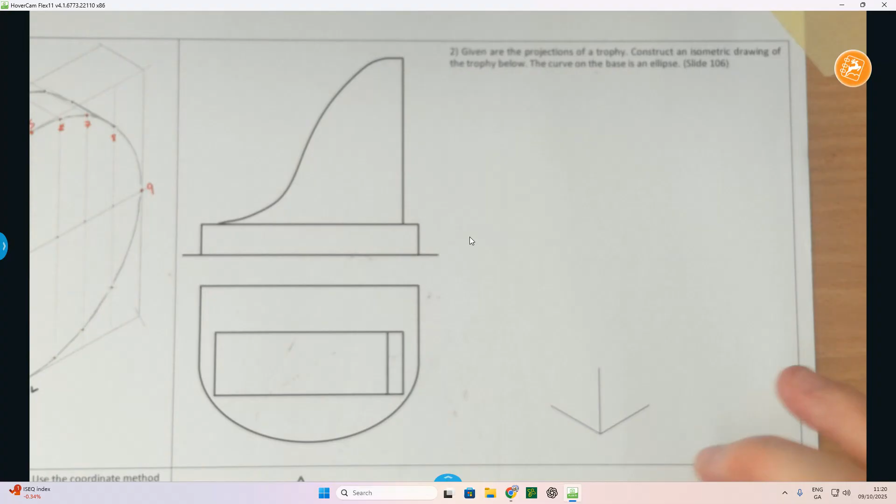The object here is going to be broken into two structures. We've got the base piece and then we have the bit on top. I'm going to start with the base piece and then do the bit on top. A little bit different from how it's done in the DCG solutions, but it doesn't really matter what way we go about it as long as we get it done correctly.

Anytime you're doing an isometric drawing, what you need to work out first is overall lengths, widths and heights. Usually in Junior Cert they would have been given to you, but for today I'm going to track that line across, top line, and put this in here. So that's my overall height, but then I have another height here on the outside for that little piece, so there's two heights: overall height and then the height of that little bit.

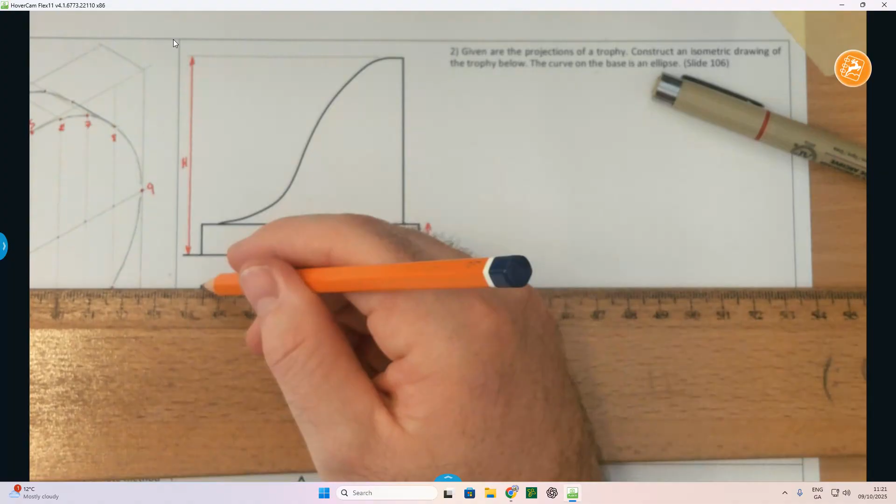Now what I want to work out is my overall width. The width will always come from the plan, so there and there. That's my overall width.

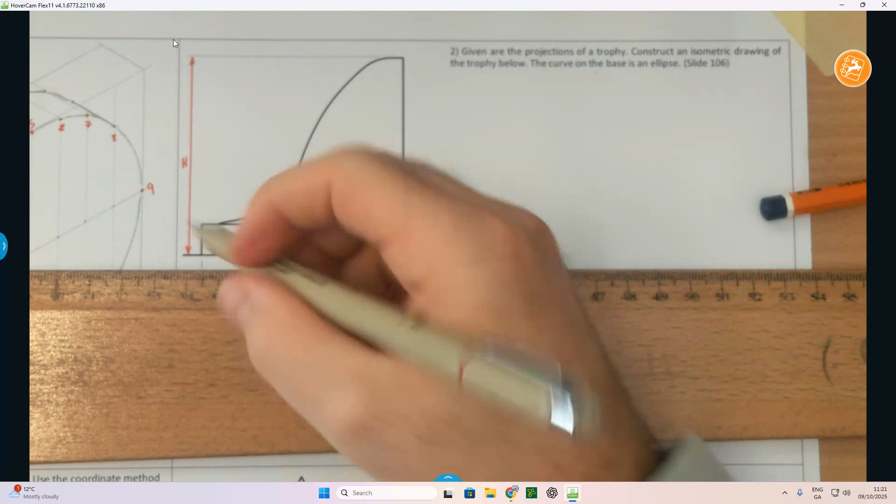And then what's my overall length? Well, my overall length is going to be brought from between there and there. Pop that in just to have a little reference. You don't have to put those in, I'm just identifying those. So length, width and height, just so we're all aware of that.

Now what I want to do is create the box that everything for the plan, or the first part here, is going to fit in, the bottom surface. That's going to be associated with this height, the correct length and the correct width.

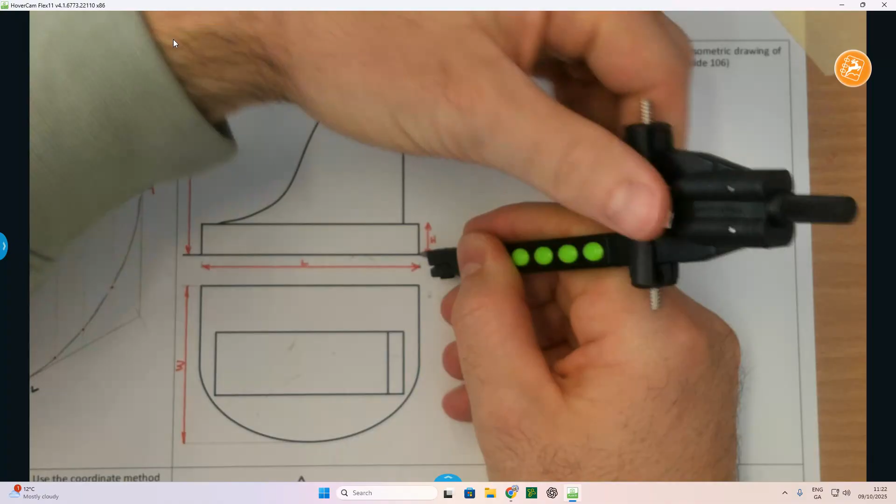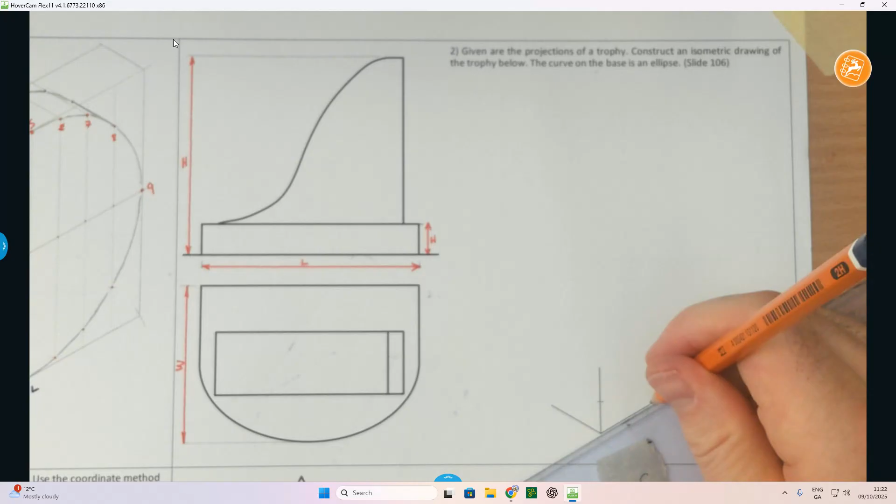I'm going to take the height from here. You can take the height from the elevation drawing here. Mark the height up along the height line. I'm going to take the length from there to there, and I'll be marking the length going at 30 degrees with my 30 degree set square. So you can just see there, 30 degrees out that way, flip it over 30 degrees the opposite way, and that's going to be my width. So I've taken the length from here out to here.

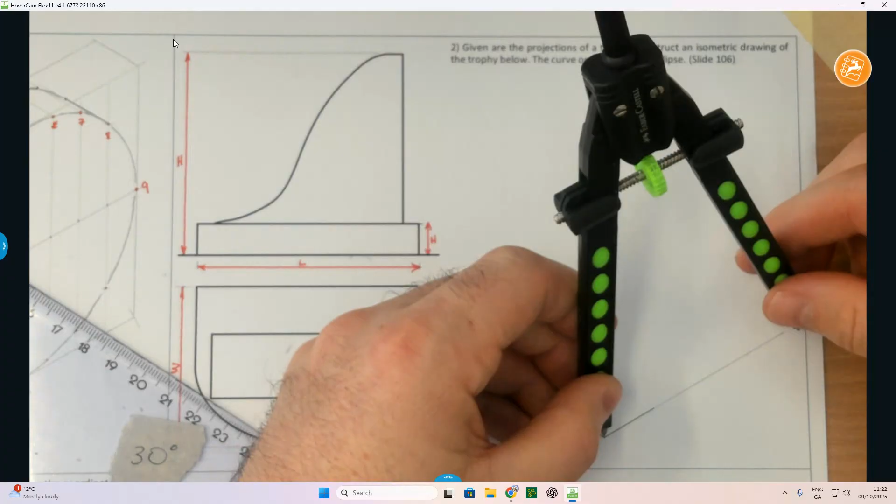I'm going to apply that to this edge right here. Need to extend it a bit further, but that's fine. Now I'm going to take my width. Mark the width out here. Once again, I just need to extend it a touch further. So there's the width, same thing with the length.

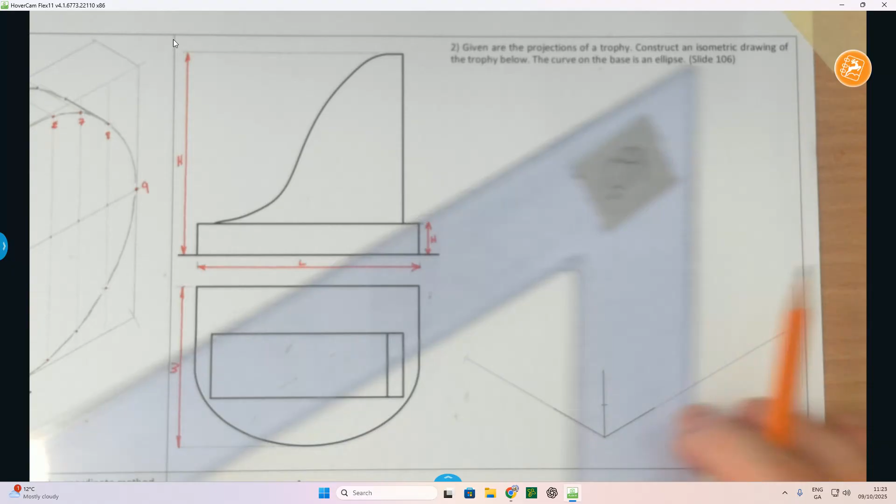Now that I've that done, little line up, and then using your 30 degree set square from the vertical height, go across, flip it over, and as I said, I'm just going to build that first object. There we go, so there's our little prism, there's our little fish tank.

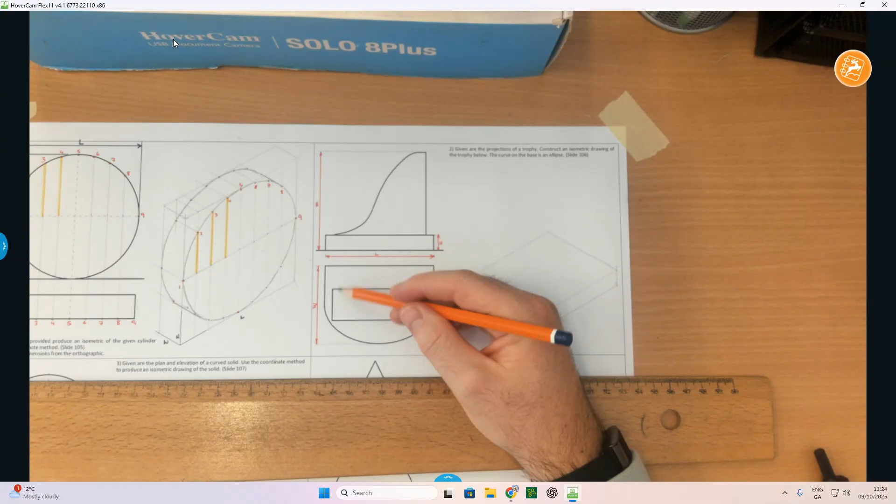Now what I want to do is make this guy here. Like we did with the question the other day in class, we're going to split it up into little sections. What we did here was known as vertical cuts, so just to zoom out, because we're working in the plan here, we're technically going to be using, they are vertical cuts, but they're kind of going horizontally in the plan. That's what I'm going to be using. It doesn't really matter which way you do it.

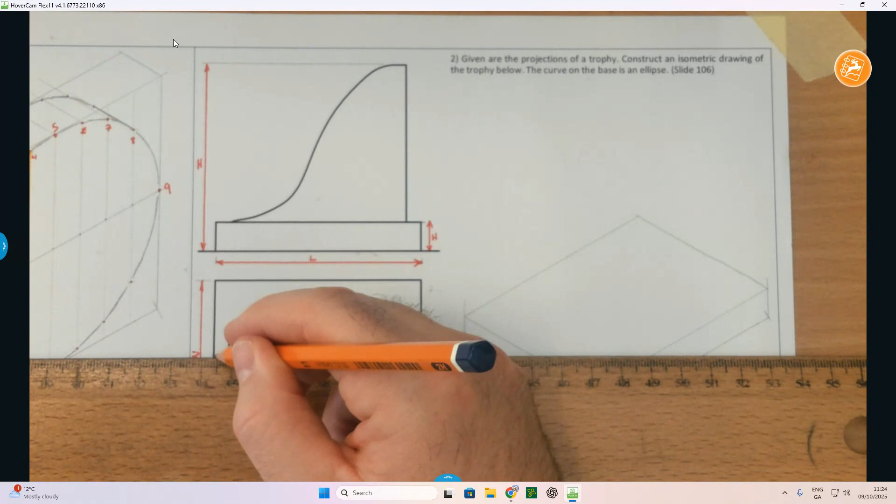So just to highlight where the curve actually starts, it starts about here, so I need to identify where the curve starts. It starts, I'm going to say about there, that seems to be where it starts. They don't really give us a measurement, girls, so we'll just base it off our sight. I'm going to do a line across like that, and that's where the curve starts, making that semi-elliptical portion.

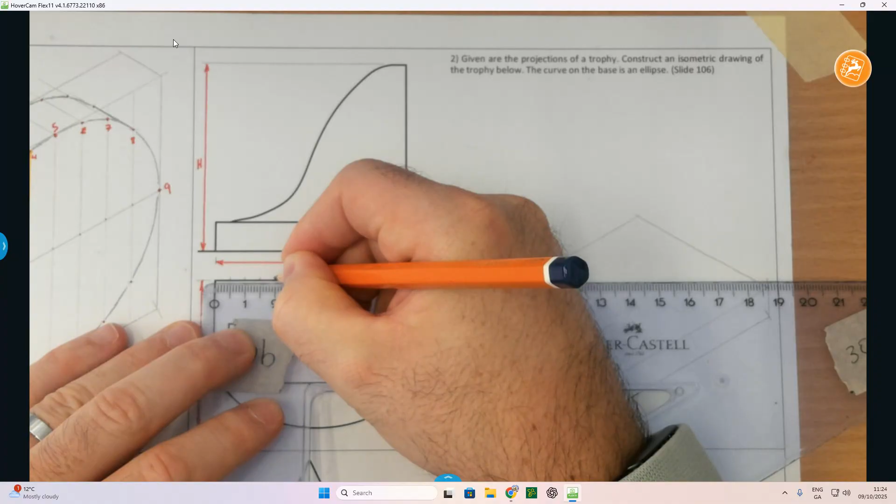What I want to do now is split it up, and I'm going to go across in increments, starting here at the left hand side, it doesn't really matter, but I'm going to go in increments of 5 millimeters. Watch: 5, 10, 15, 20, 25, 30. I'm going to do the same from the opposite side, so from here, I did 30, so I'll do 30 in as well. See the way I'm just going in increments of 5? Now by going in increments of 5, I'm giving myself more work to get points, but just popping those in.

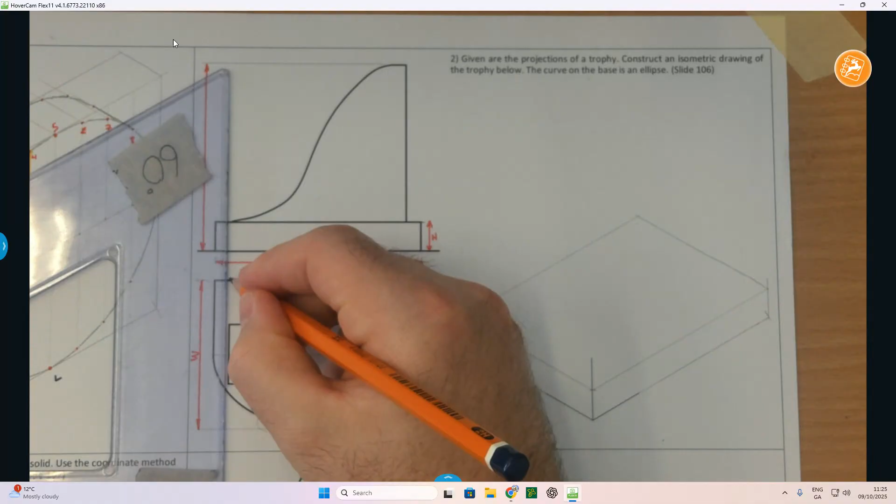Now those vertical cuts, I'm going to start slicing through it. Actually that's really handy that this first cut of 5mm seems to actually go straight through that line, so that's helpful.

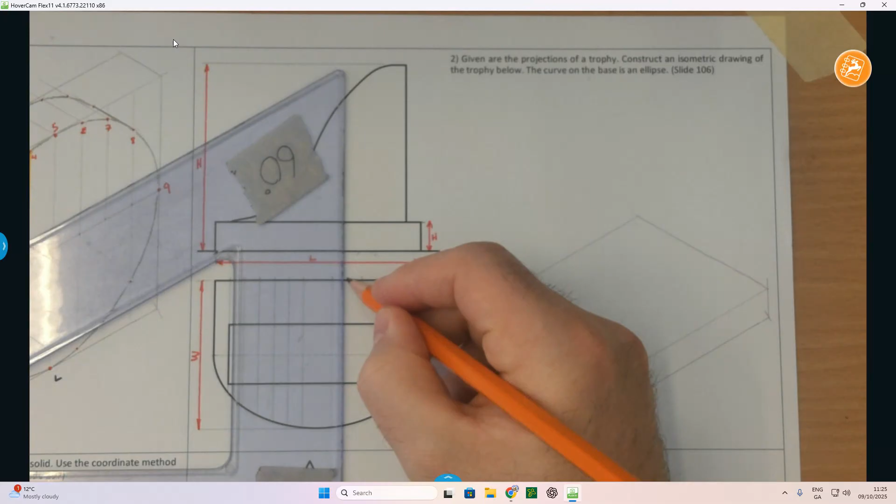Later on, all I'm doing is taking all of those guys. Looks like they're nearly there. Probably didn't need these ones, but that's just kind of what I went with, girls. Okay, it's like we're just splitting it up.

Really handy there, that bit now. Okay, and there we go. There's our little cuts. Now technically all those cuts are going to identify points on the curve for me. So see all those points?

Okay, there, and so on. Now technically they're all my points as I work my way around. I do want the one in the middle, so how would I actually get the middle? When I don't know the length of the line, I am going to bisect it.

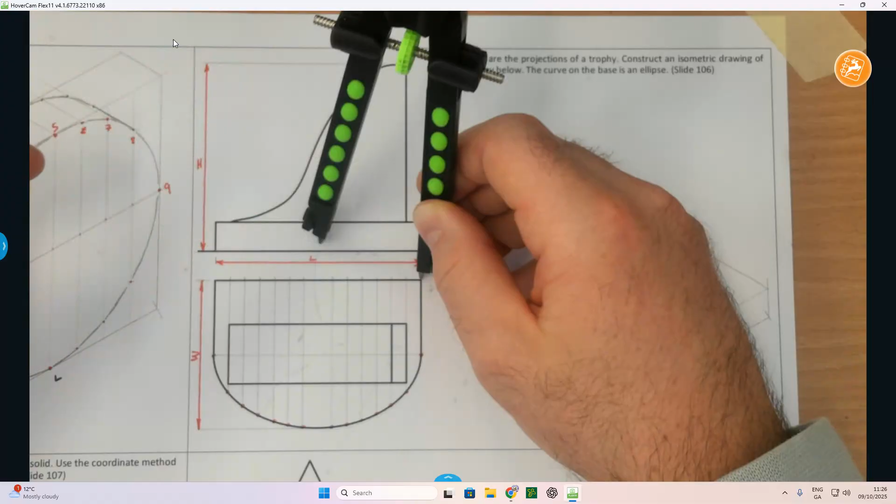So bisect the line here. You can always bisect the line to figure it out. So you can see how I've done my bisector there. And now that I've got the middle, I'll just pop that in down here. And that's the middle. Okay, not that I'm too pushed about that, but just to give me the exact distance I want.

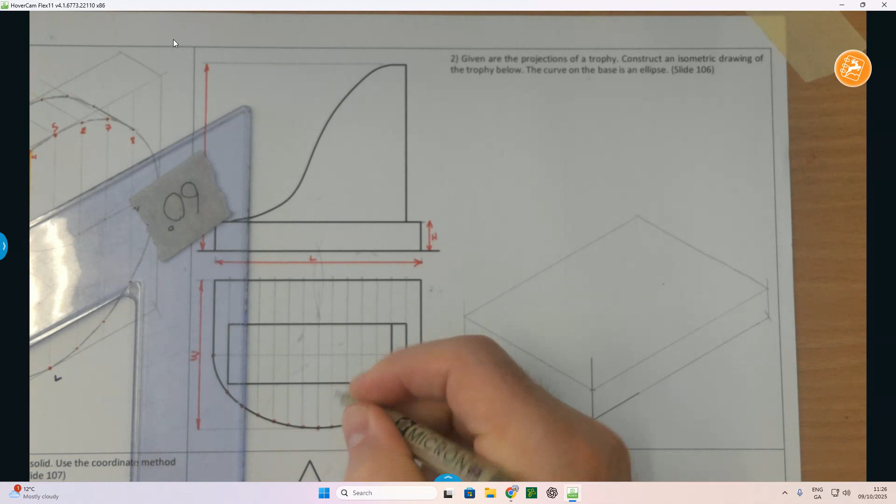Okay, now just to explain, I'm going to say that this is 1, then I've got 2, 3, 4, 5, 6, 7, say 8, 9, 10, 11, 12, 13, 14.

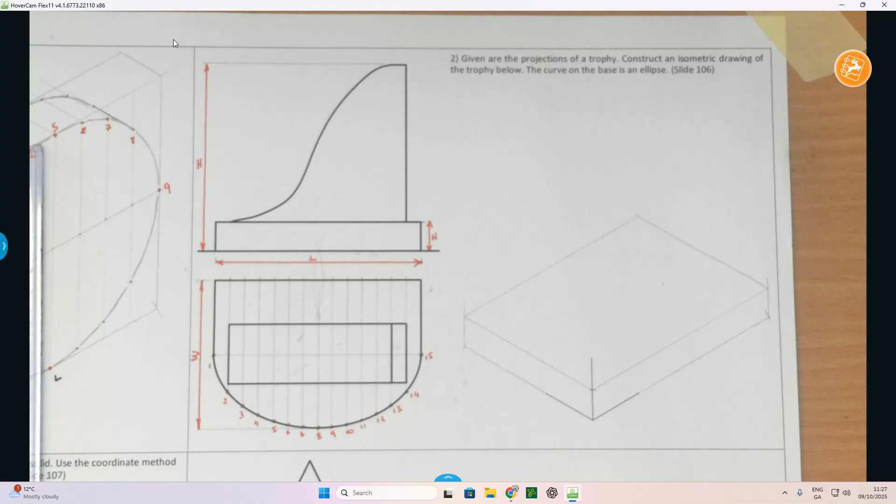I probably gave myself way too much work here on how I've done it, but it's absolutely fine. Okay, so what I want to know is that 1 is in line with 15, 2 is in line with 14, 3 is in line with 13, 4 with 12, 5 with 11, 6 with 10, 7 with 9, if that makes sense, because we measured in 5mm both sides.

So what I want to do now is divide this bit up here into increments of 5 as well. Starting here, doesn't really matter, at the back, because that's going to be the back edge. I'm going to measure, starting with the 30, so measuring increments of 5, 10, 15, 20, 25, 30, so that's done there. Same thing going backwards here, 5, 10, 15, 20, 25, 30.

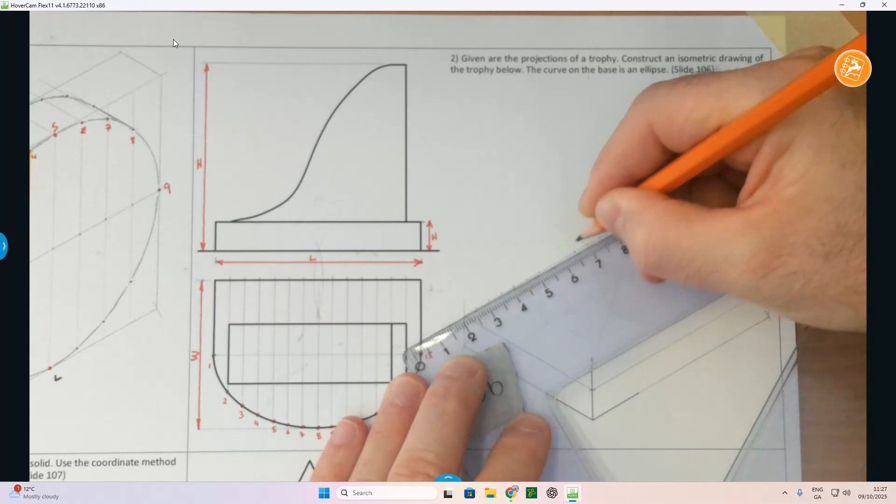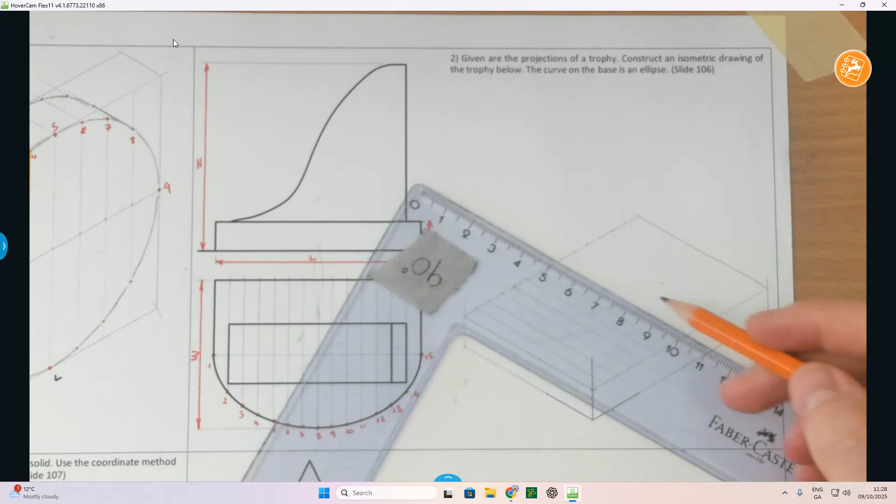So there's my guys. Now what I'm going to do is pop those in like this, just like little 30-degree lines like that. There we go. Now there is one in the middle. We'll worry about that later on.

Okay, so there we go. I'm after putting in my kind of lines at 30 degrees. Now, the question is which is where, okay? So 1 is along this, 2, 3, 4, 5, 6, 7, then there's 8 in the middle there, but 9, 10, 11, 12, 13, 14, 15. How do I find them?

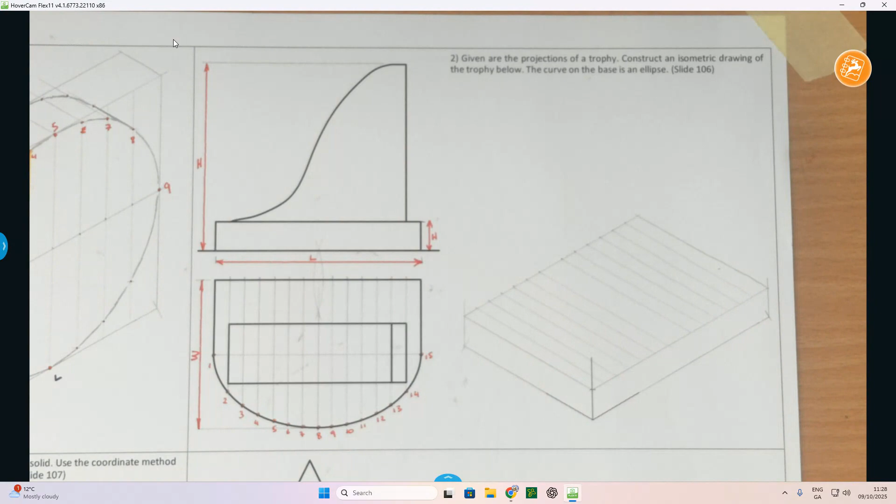Now, essentially, all I'm going to do is take this distance here. If I want to find number 1, I'm going to take the distance for that bit there that I've highlighted. If I want to find number 2, I'm going to take that distance on my compass. Okay, so, and I repeat the sequence. So to find number 1...

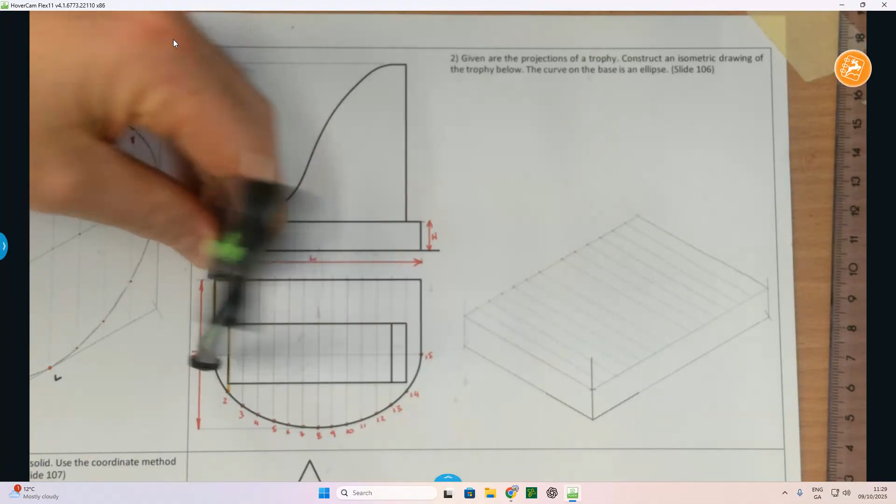Number 1 is this one here. Okay, that distance there I'm taking on my compass, you can see it there. I'm going to come over here to the edge, that's because that's where number 1 is, and mark it off. Now what is 1 the same as? 15. So go to the opposite side, mark it there.

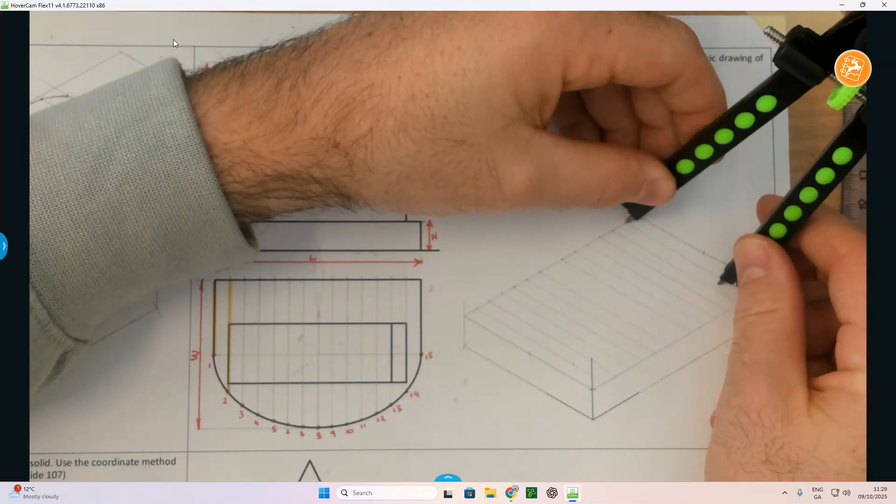Now I'm going to take the distance for number 2, and go into the next one. This is the second one in, and the second one in from the opposite side. Okay, now I'm going to take the distance for number 3.

That's why we need a good sharp compass here. Into the third one, and then the third one in as well on the opposite side. Into number 4. And I'll go into the fourth one, and then the fourth one in.

Because the object is symmetrical, it'll work out. Number 5, slight adjustments here each time now. Into the fifth one. And then into the fifth one again.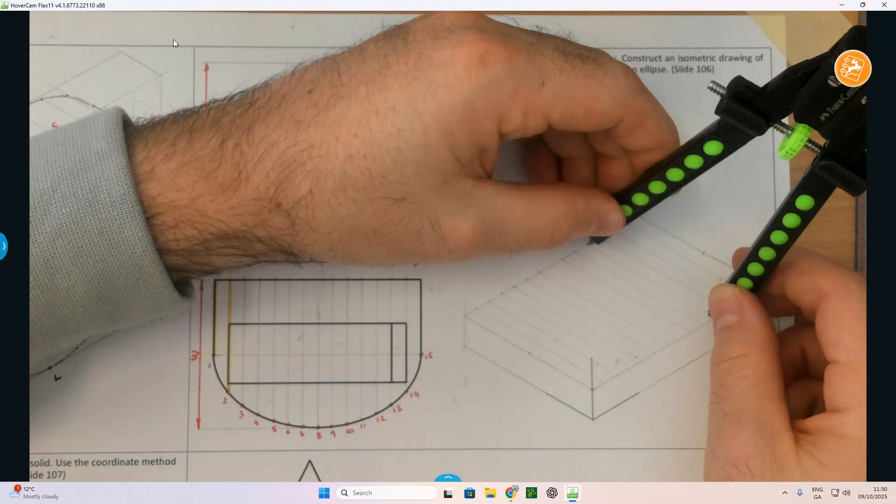Number 6. And keep going in that sequence. Finally, number 7. Here's number 7, getting very close, and you can see it is working out.

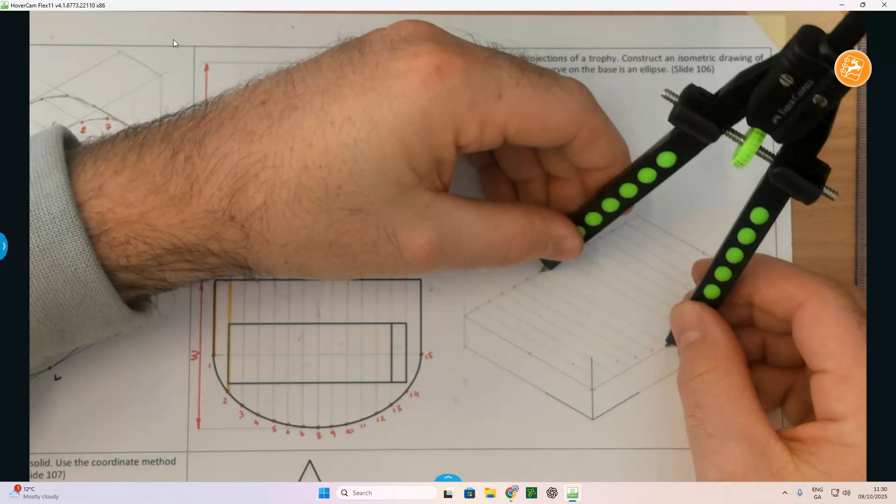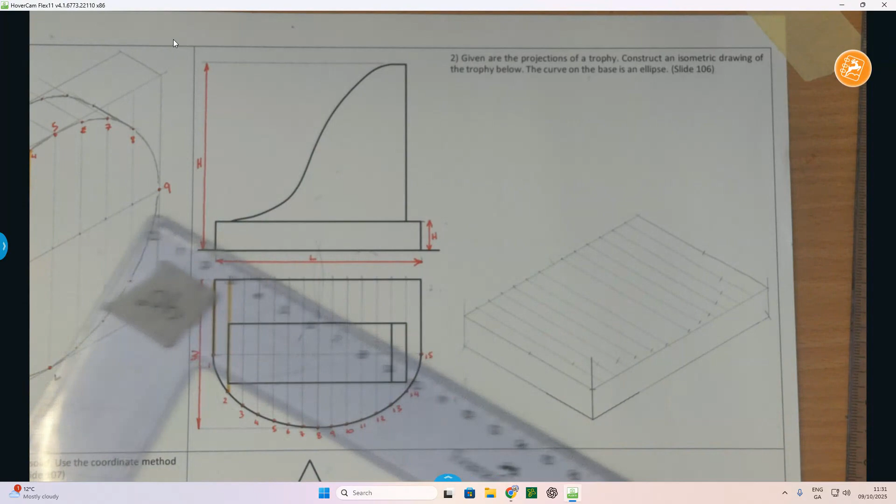Okay, and now what I could do to get the one in the middle, I could take the distance from here to the middle. See that distance I got there? And I'll mark it here along this guy if I'm doing it accurately. Close enough. Now that guy, if I just mark it there, should hit on the edge in there. Okay, there we go. Okay, I didn't draw the line fully.

But that's it essentially, guys. Okay, there's all our points. Now what I'm going to do is between all of those, I haven't numbered them, but I'm just going to follow that little sketch around. Just put a little dot on each one. These questions are quite fiddly because they're just so small. You need a good sharp pencil to be accurate with them.

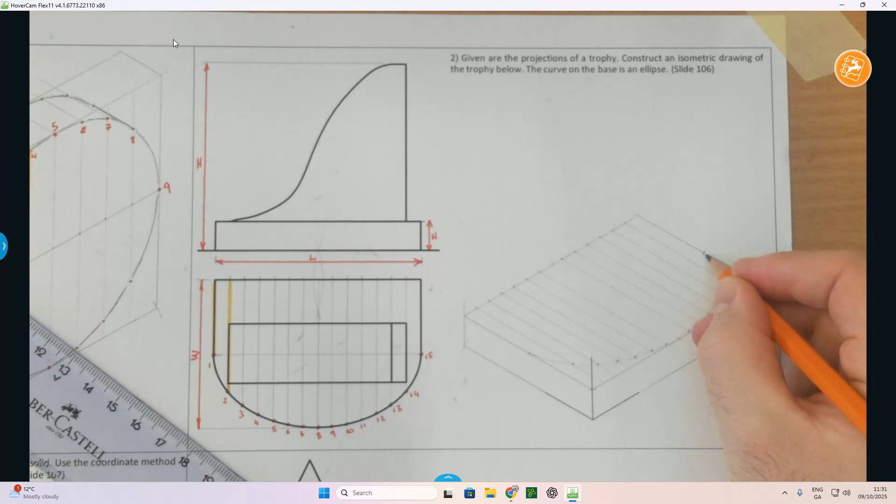And it will take time. We'll work our way along. Keep going. And there we go, there's our little curve.

Now, how do I get the bottom portion of the curve? It's really simple, because this guy here is just going to go down there like that. And what I can do from all of these points is just do a line down, a line down, a line down, down, down, down, and so on, just repeat the sequence from here.

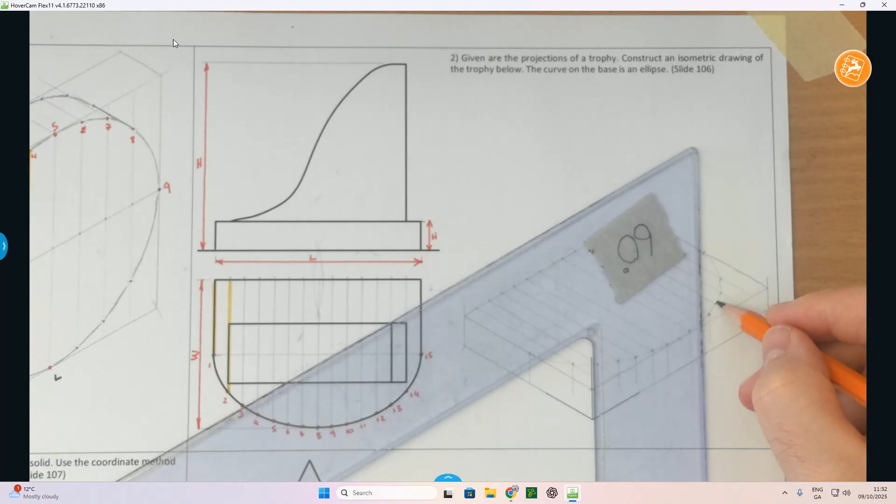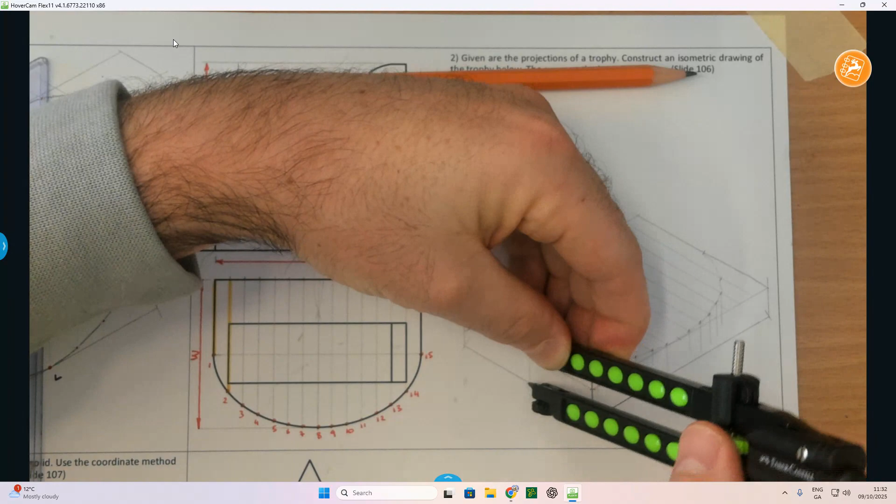Eventually you get to a point where you can't see it anymore, so it's around there. And what do I do then? I can take the height, either from here, from over here, or I could just take it off the drawing, which is probably a little bit more accurate. Taking that distance down there, just like that, and I'm going to go to each point and mark it off.

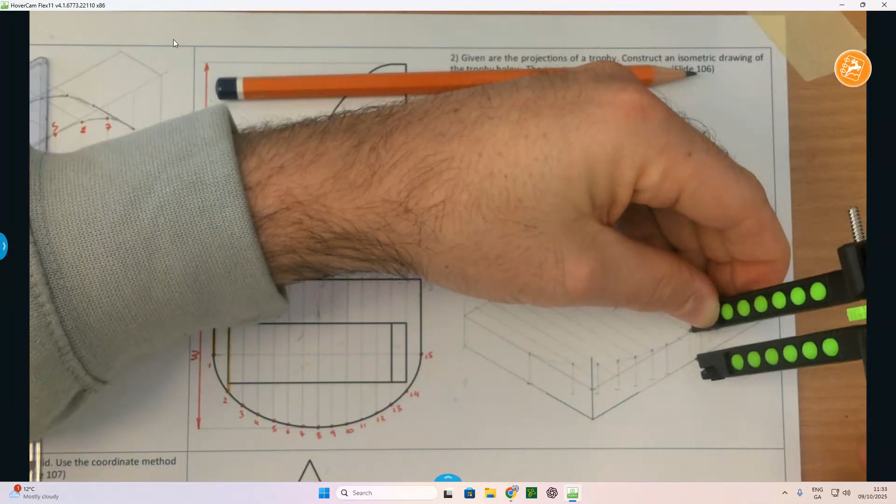1, 2. You might need to extend your lines, like me here in a second. And see what I'm doing there. I'll work my way around. See how neat and tidy we have to be. Okay, and there we go.

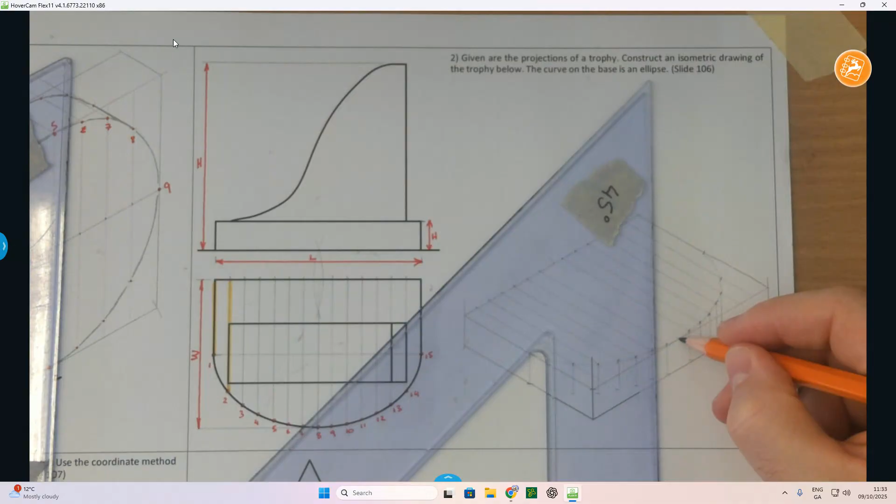Now the one in the middle, I've forgotten that one, nearly done the first part. This guy will just come down there, that's going to be there. So I need to extend a couple of these lines now to hit those compass arcs, this one as well. There we go.

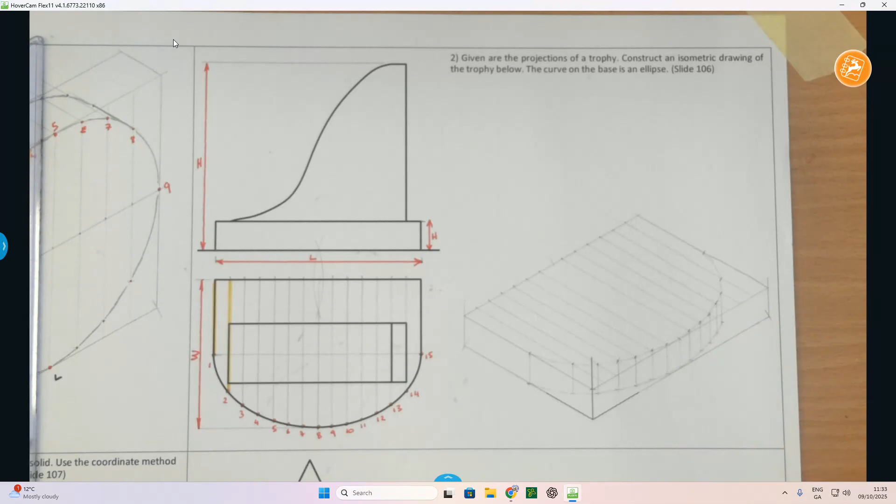Now, same principle, from here sketch through the points, through there and on. Okay, and there we go. So that there is the first part of it done.

I'm just going to use my marker now to go over it, just make it stand out before we get onto the next portion.

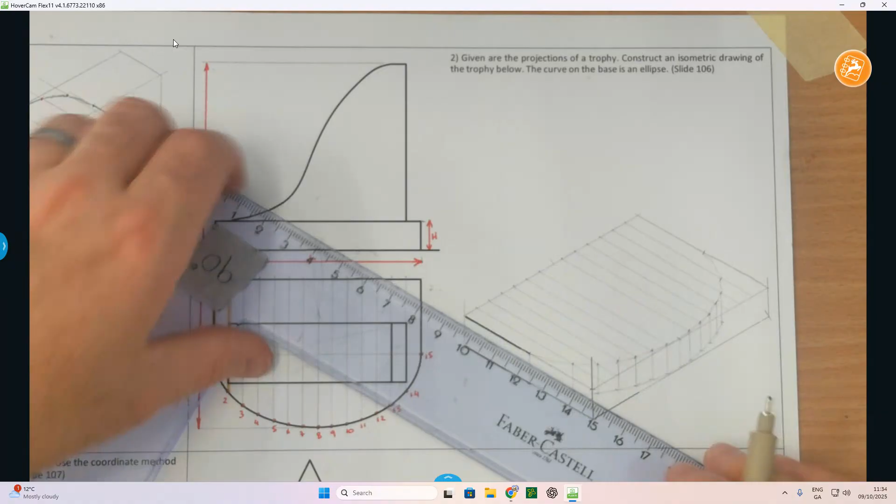Okay. Now, take our time into sketching, working our way around it. Okay, same thing underneath.

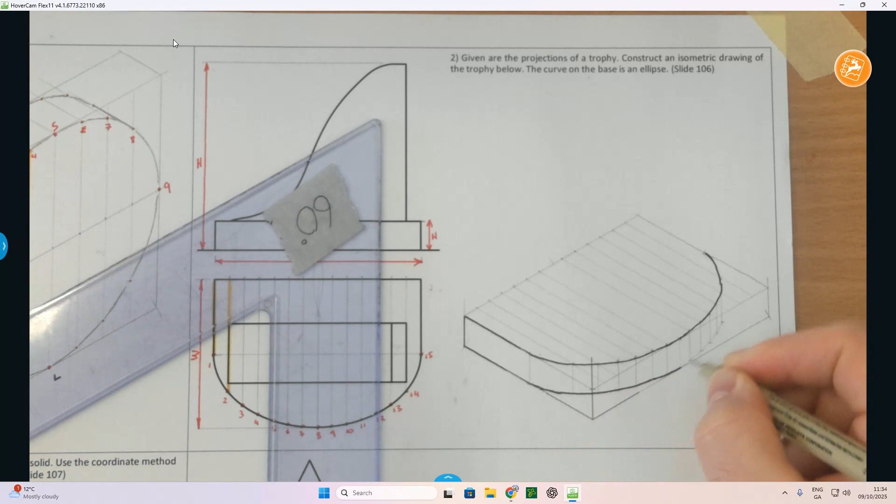Okay, and when I get to there, that's where the curve kind of rounds the corner and I can't see it anymore, so we just put in a little line like that. Now I'm not going to heavy it in, I'll probably heavy in a touch of this, not sure how much I'll see, and I don't know how much I'll see there either. Okay, so that's the bottom portion of it done, girls.

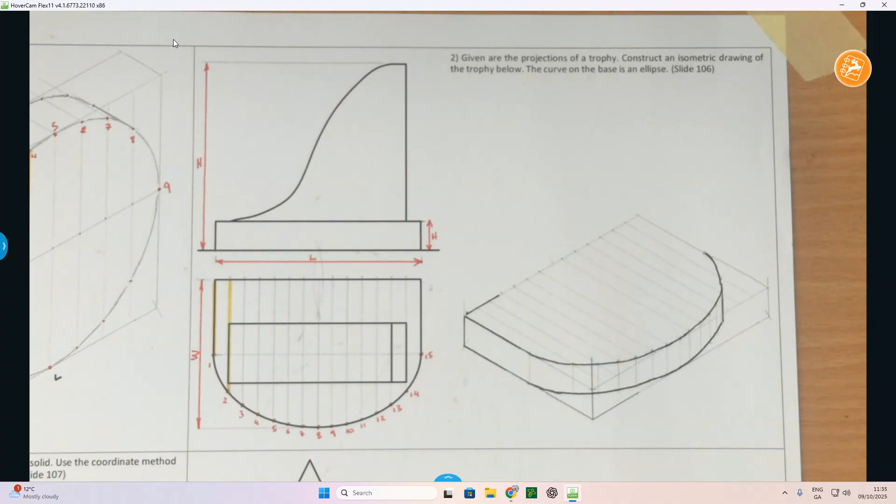Now what we're going to do is the top portion here. To get that little block in, we can see it comes from, see this little 5mm line there? That's where it starts and it ends over here. So, quite handy, based on my 5mm increments, it just so happens that it lines up with it. That means technically that guy there, because it doesn't start right on the edge, it starts 5mm in, as we can see. So it's actually going to start on this line here and this line here at the back.

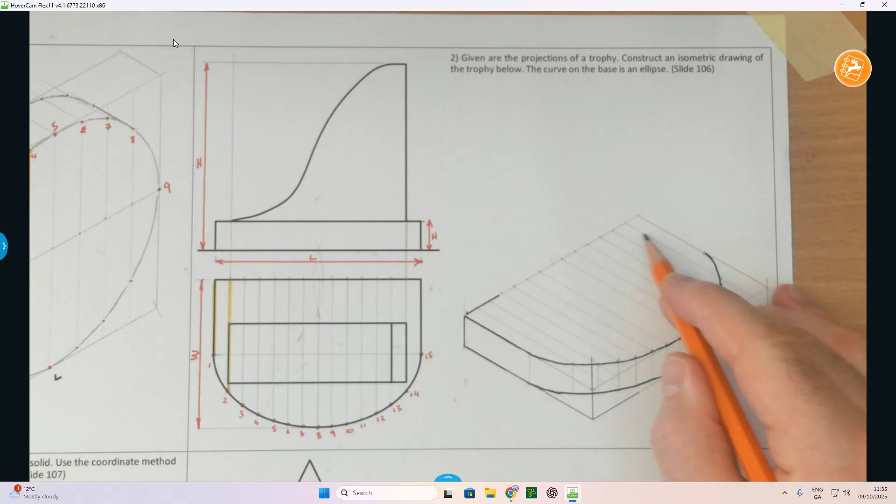But what I need to work out is the width of it. So just in green here, I'm going to highlight this, girls. I'm going to take this distance here with my compass. Okay, that's the first measurement, and the second measurement I'm going to take is that distance. So those two widths. Bear with me here, let's just run over. So those two widths are the measurements I'm going to use.

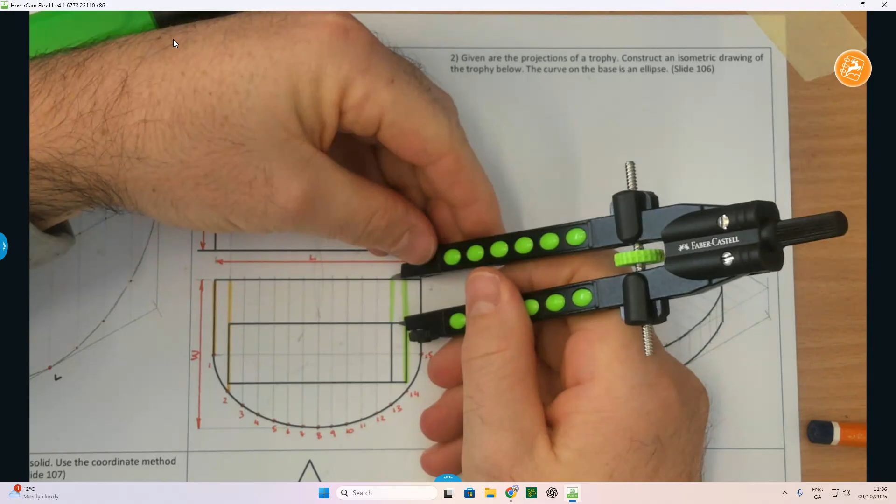Width 1, I'm going to take this guy, you can see it right there. I'm going to mark it in here. It doesn't really matter where, as long as it's along the 30 degree line. So that's the first width. And width 2 is this guy, I'm going to mark it along that line there.

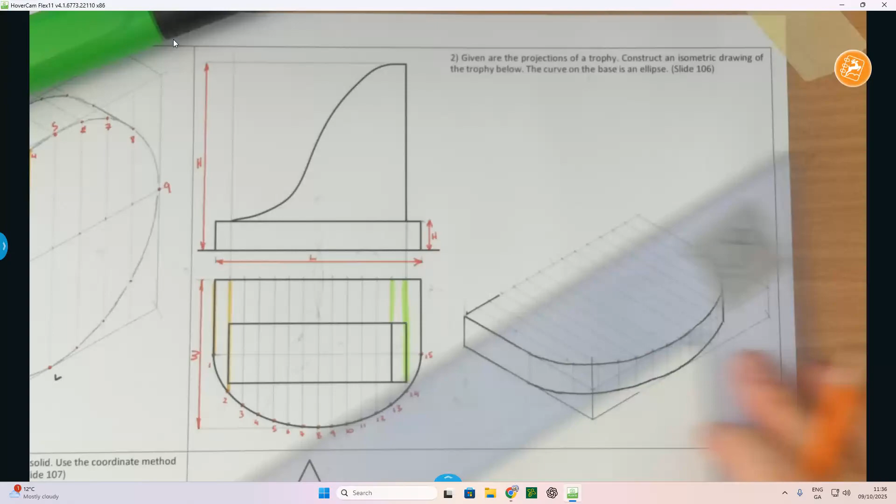Okay, now that I've done that, let's draw in where the base actually would be. So it'll go to there and there. So that is essentially, excuse me, my base. Okay, so that little shape there.

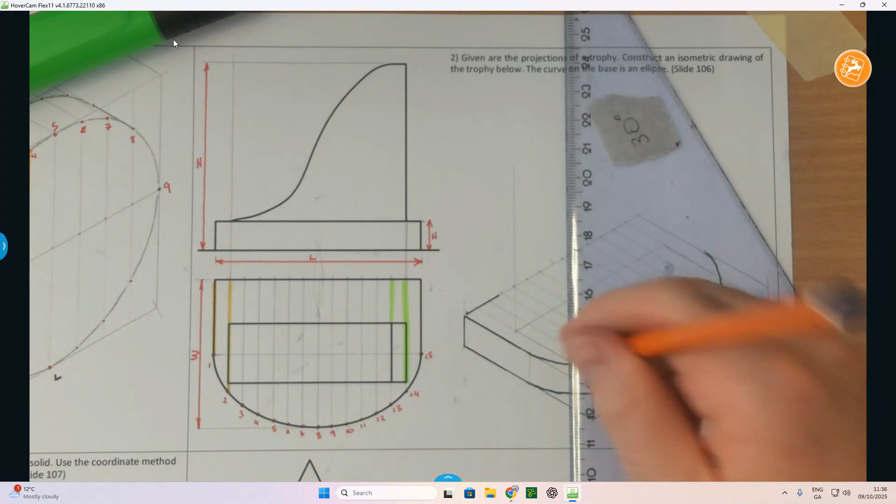Now, it has a height. So what's the overall height of that now? What I'm going to do is I'll line up, I'll line up, I'll line up, I'll line up. Okay, just to make that little box. But where is the height then?

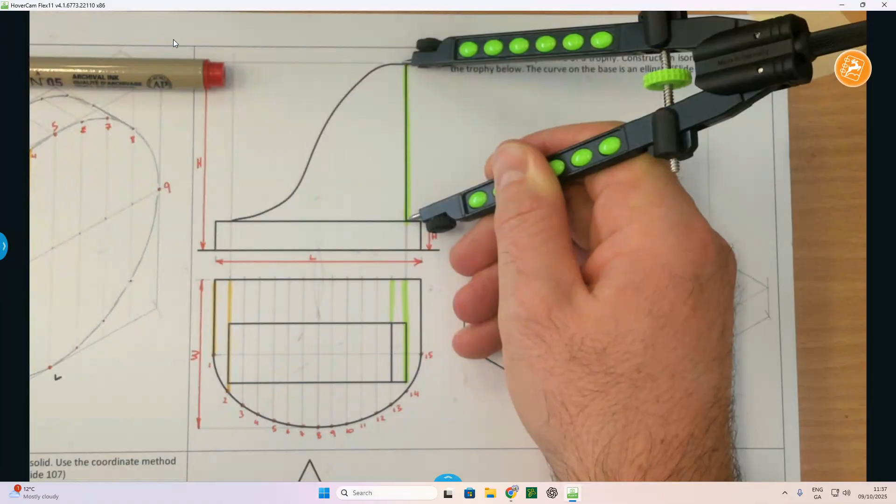Now the height I'm actually going to take, a little bit of a different height here, I'm going to mark it in green again, is this height, from there to there. So that's the height I'm going to take off my drawing. Take the height of this guy. Okay, and I can mark it on one of them, so I've marked it there, you can see where I marked it from. Now that I've got that, simply go 30 degrees that way.

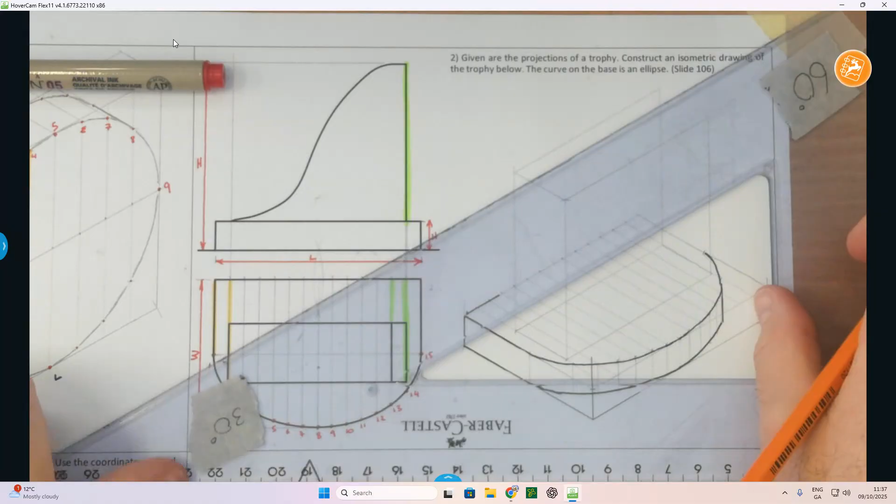30 degrees there, with me now. I'll go across there like that then. Okay, and there's our little box for that to fit inside. So you can see how much I'm able to have in. I actually went in too much there now that I look at it.

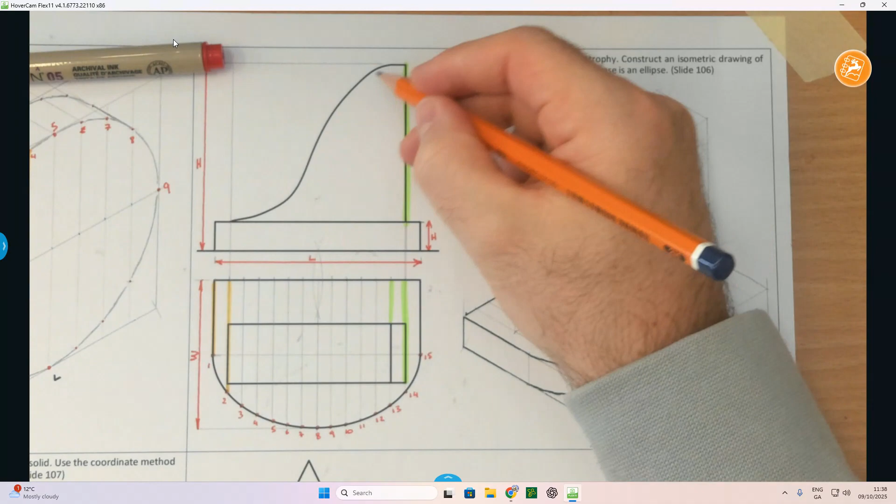So now what I want to do is split this guy up. I'm going to split it up into less to give myself a little bit less work this time. It looks like it's roughly about 60 long there. Starting from the left, I'm going to measure in increments of 10. So from here at the top, 10, 20, 30, 40, and the 50 seems to hit right there.

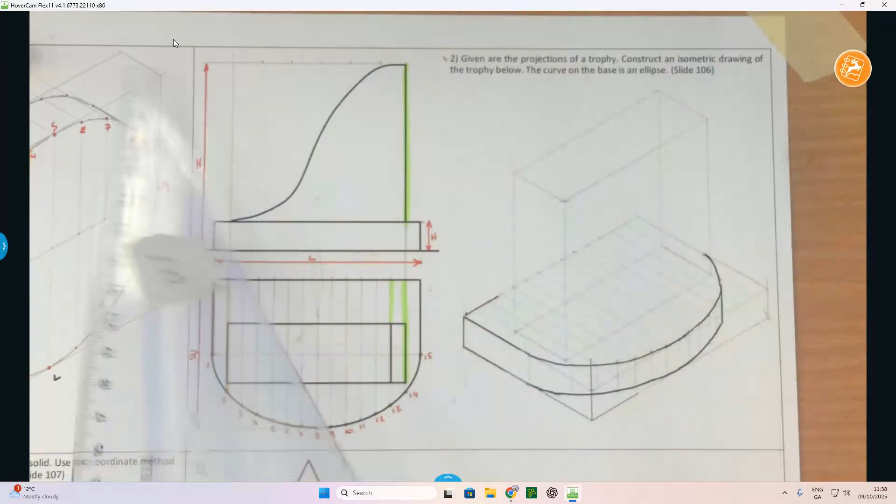What I'm going to do is little vertical sections going down through it again. Vertical cut, vertical cut, vertical cut, vertical cut, and a vertical cut. Now, because I've split it up into 10 over here, I'm going to do the same thing over here in increments of 10.

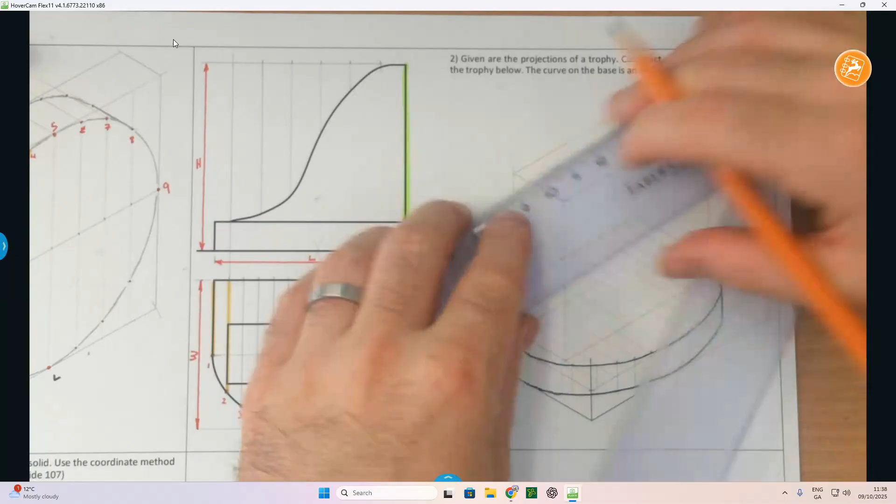It looks like it is starting there. 10, 30, 40, 50 there. Done it at the back. So what I'm going to do is a line across there. Probably should have measured them on the front, but same concept. So I'm just going to cross it 30 degrees to bring them down along the front.

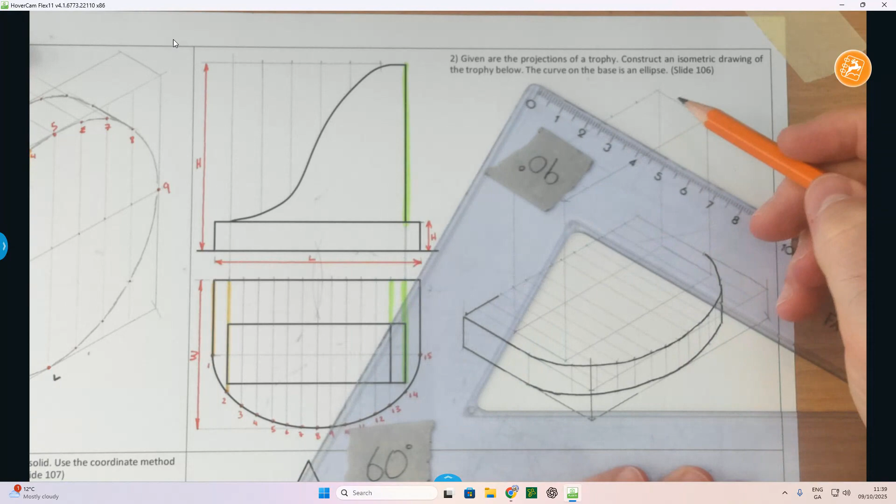So they've all gone. Now, what do? I'm going to bring the lines down here. I'm not going the full way because I don't need to go the full way in all of them.

Now the measurements I'm going to take for each curve, this one's starting right here, so there is a point right down here in the corner, that point there. The next distance I want to take, once again I'm just going to mark it in green, is that distance. Then the next one I would take is this distance, this distance, distance, and distance.

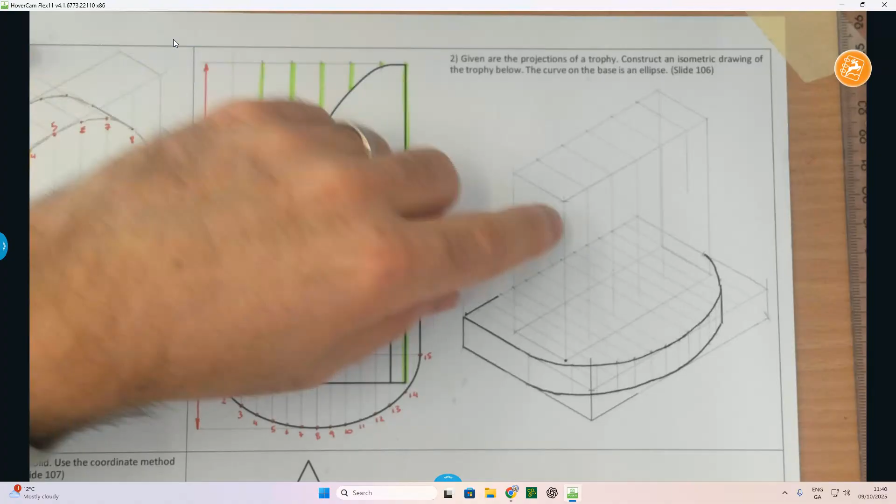Now, with my compass, I'm going to take that distance on my compass, from there to there, okay, and that's the first one in, so this one in, and I mark it down from the top.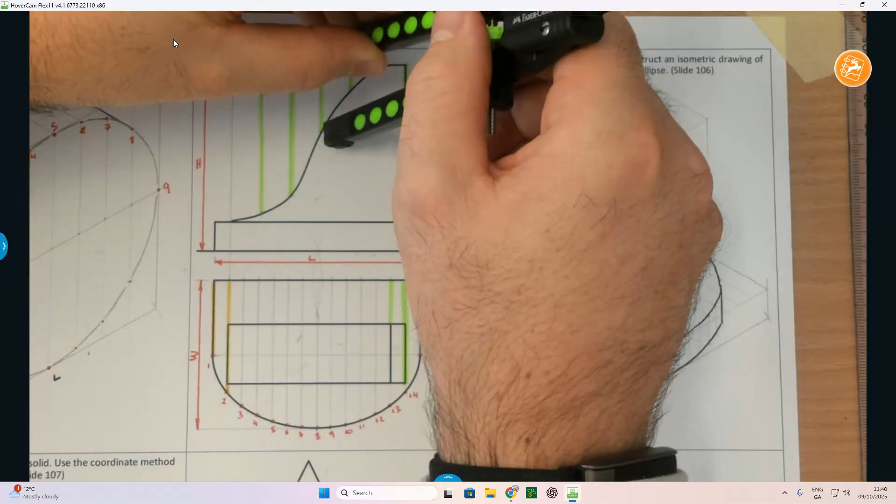Then I go to the next one. You can see here hopefully what I'm doing. Taking that guy, I want to go into the next one, mark it down. Just by dividing it up into little cuts and little sections. Taking the next one and mark it down. Then the next one. At this point it's getting quite hard because it's getting a bit smaller.

And the very last one here, like that looks like it's about 1 or 2 mil down. So I'm going to have a rough guess there. But that's about the same distance down. So there we go.

That's our curve. So from here I'm going to go through all those points up to here, just literally as best I can. Look at this for kind of your inspiration for the sketch. It's going to go up there. Now it's going to start curving upwards, into there, into there, over. So a bit of heavying in here now.

We'll take our time with that now. Just going to make little dots on these so they stand out a little bit clearer. So that's the path I want to follow.

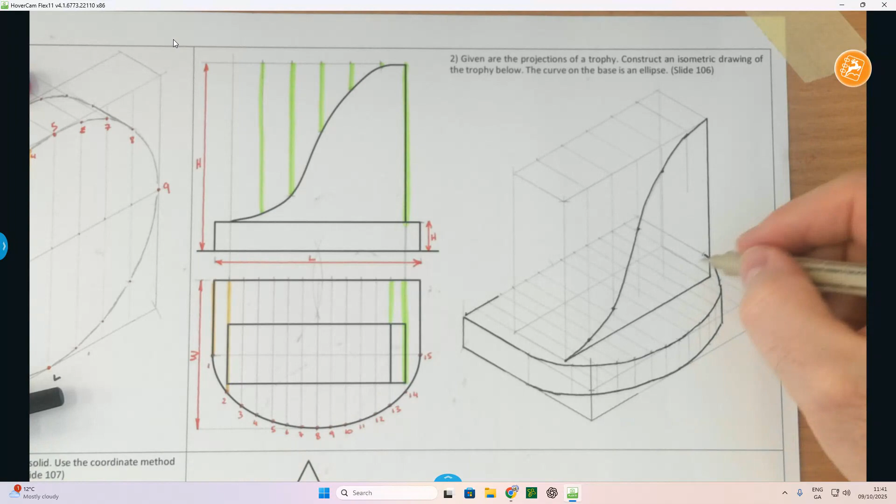Nice smooth path. As you can see, I went in a little bit around the edge too far at the back. Now what I want to do is get those points at the back. So the easy way to do that is from the individual points that you found, track a line across at 30 degrees. It's quite hard now because there's kind of lines everywhere on this drawing at this stage.

You follow your method. Track those lines across, and I'm going to take the distance from this point to this point on my compass, which technically should be that distance right there. I'm going to check it here. Yeah, there we go. I'm going to mark it from each individual point.

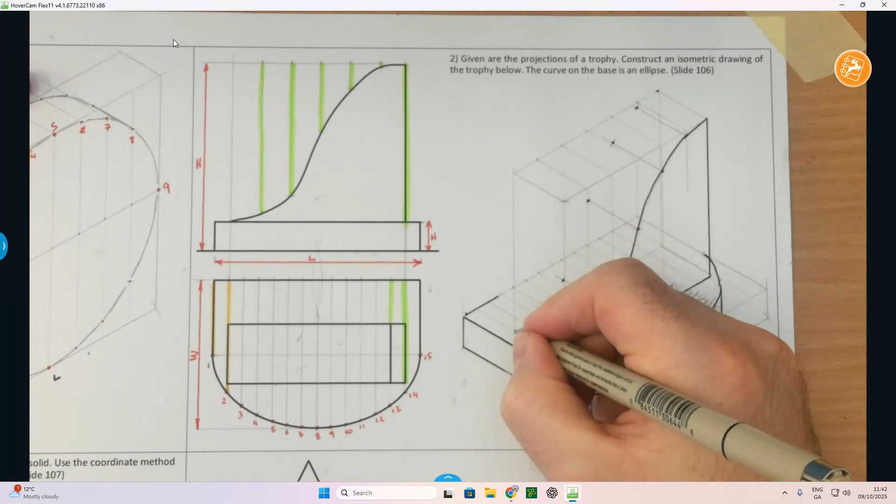Now, once again, take your time with the sketch. It should look like it's flowing the exact same as the one in front.

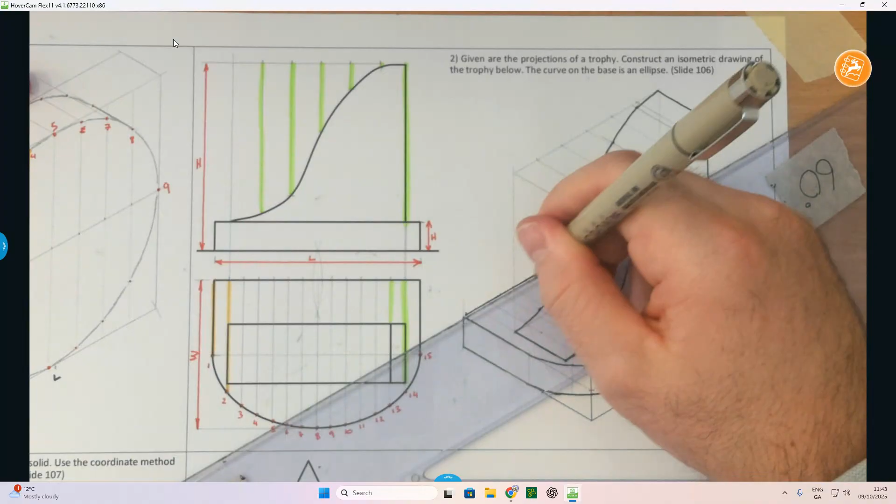Now I can see how far I can heavy in this back edge. And there we go, and there's no hidden detail. Went in a little bit too far in that bit there, girls, but okay, that's the question done.

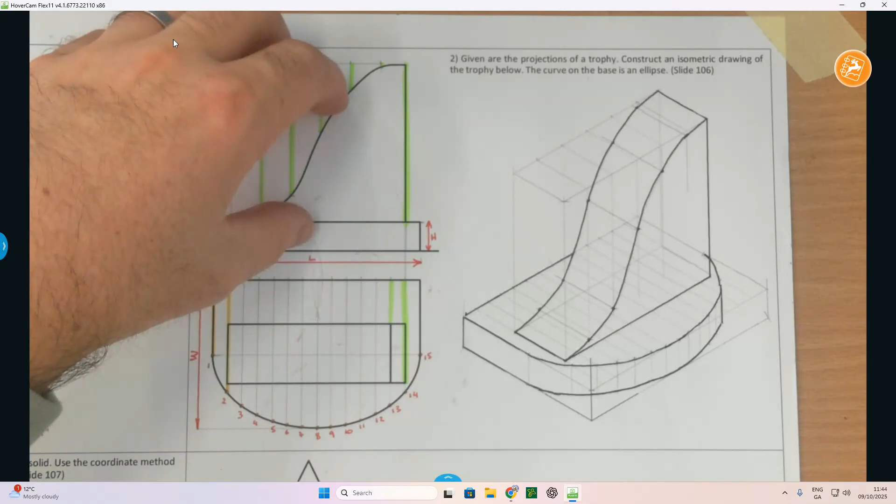Now, as I said, nothing like that will ever really come up in a Leaving Cert, even at ordinary level it wouldn't really come up like that. There's probably too much on curves there, but it's just a pure skills thing, as you can see, of taking the correct measurements from the elevation and plan here and applying them to the isometric. But that's your homework there, girls. There's quite a bit in that now, so give it a good go. There you go.